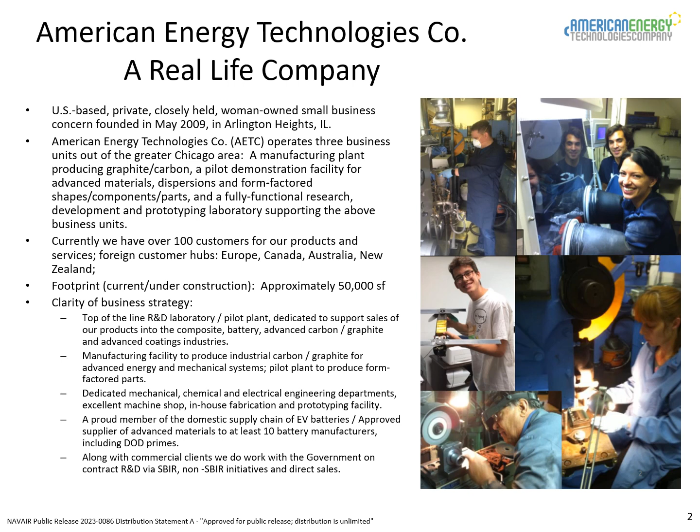Along with our extensive work with commercial clients, we also do work with the government on contract R&D via SBIR and non-SBIR initiatives. What technology have we developed that primes need? Currently, ramjet and rocket technology is undergoing massive innovation, with the industry attempting to transition from traditional fuel technologies into a more advanced metallized fuel component, which could drastically improve the range and performance of rocket-powered munitions.

With this in mind, AETC developed an innovative, carbon-based ablative nozzle liner that will maximize the combustion performance of an entirely new generation of rockets operating with the aforementioned advanced fuel. In order for this fuel to be rated for use in advanced rocketry systems, a more robust, higher-temperature material that can properly manage the energy contribution to the thrust is required for the nozzle insert. The thrust contribution, which is currently not a feature of traditional nozzle insert manufacturing technologies, will allow for increased performance and a substantially longer flight range. This particular nozzle insert technology, which has been developed, also has a unique application utility in solid fuel ramjets.

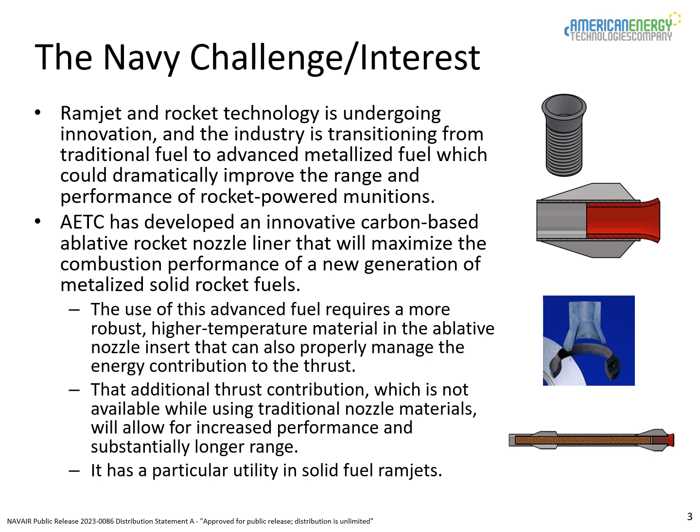What has been improved? AETC's nozzle technology was developed in order to improve the utilization of metallized fuel in air-breathing applications. The technology offers an improved thermal conductivity and increased reflectivity, withstanding the high temperatures generated in advanced fuel systems, with a longer burn endurance, leading to increased thrust and performance of the rocket vehicle. AETC's nozzles provide a contribution for the after-the-throat energy release to the rocket's thrust, which, in turn, will allow for a substantially longer target range.

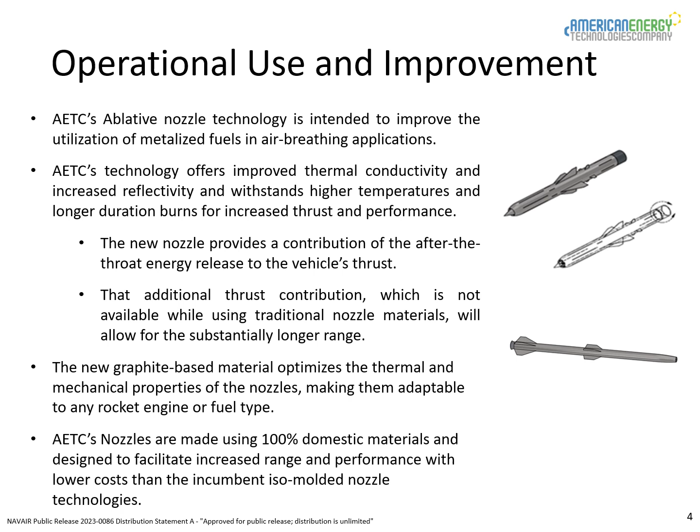The new nozzle is comprised of a graphite-based material so as to optimize the thermal and mechanical properties of the nozzles, making them adaptable to any rocket engine or fuel type. These nozzles are made using 100% domestic materials, designed to facilitate increased range and performance for lower cost than the current incumbent iso-molded nozzle technologies. More specifically, traditional technology is manufactured via large billets, which are up to 60 inches in diameter. Please refer to Figure A.

This method requires extensive labor and incredibly expensive and large equipment. The billets are precision machined down into discrete parts, sized to the diameter for the ablative nozzle inserts. Considering how large the billets are to begin with, a significant amount of the expensive, iso-molded graphite ends up in the process waste stream to create the final product. Our uniaxial compression molding and precision die capabilities are utilized in order to manufacture our ablative nozzle parts, instead of using the large billets, allowing for major cost savings over traditional technology.

Our primary objective in developing this technology was to prevent condensation of the oxide phase on the nozzle. AETC's advanced capabilities have thus far resulted in the fabrication of several candidate carbon composite materials uniquely suited for new formulations of solid rocket fuel.

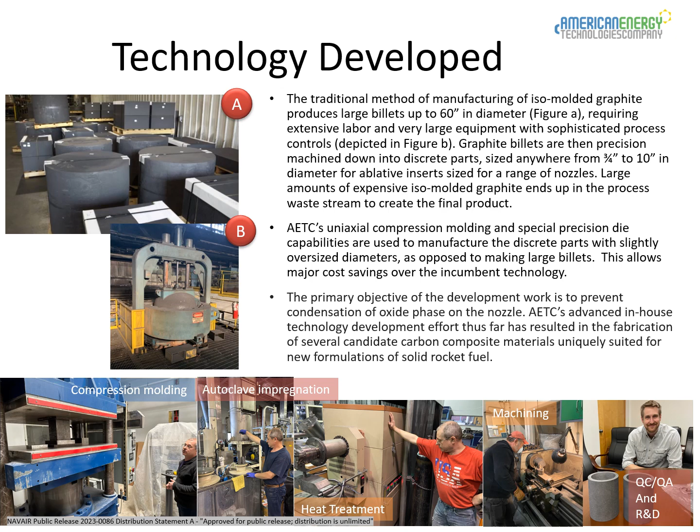This project is currently situated on TRL-5, with a projected TRL-8 ending. AETC will require additional funding following the SBIR contract end date in order to enable the production of form-factored prototypes for testing. AETC will demonstrate our ability to produce the prototypes, generating them for qualification testing at Naval Air Warfare Center, Weapons Division, China Lake.

Successful technology validation by government testing facilities will open a pathway towards the commercialization and upscaled production of the nozzle parts in order to integrate them with primes such as Lockheed, Raytheon, and Boeing. AETC is looking to generate interest within the Department of Defense, with organizations such as the Army Space and Missile Defense Command, the MDA, NASA, and more.

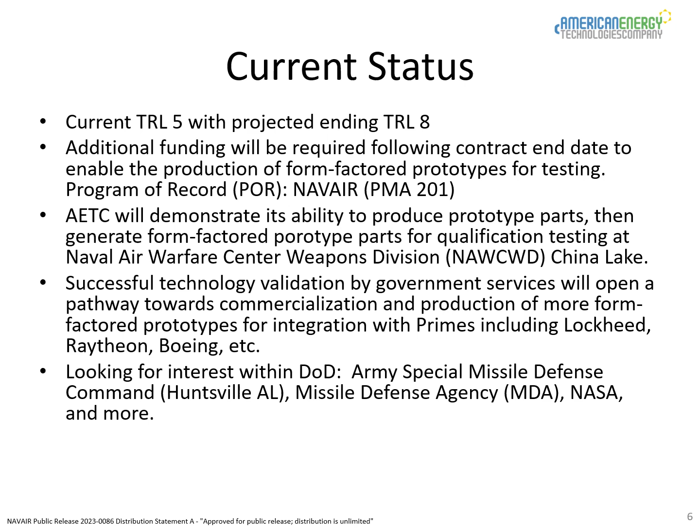A few advantages and benefits of the technology include its ability to enable potent, advanced metallized fuel, so as to dramatically improve thrust, range, and rocket performance in rocket engines. Since these fuels typically require a more robust, higher-temperature material, AETC's technology can maximize the combustion performance of new-generation rocket fuels. Our nozzles are also suitable for all current and future production rocket-powered munitions.

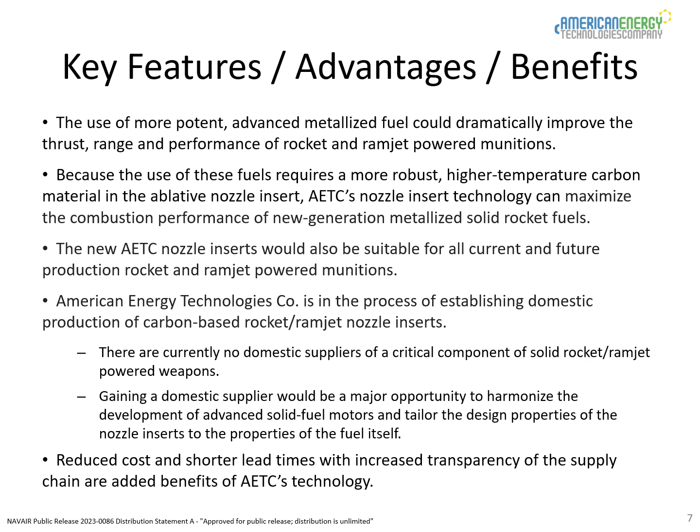AETC is seeking to establish domestic production of carbon-based rocket nozzle inserts, as there are currently no domestic suppliers of a critical component of rocket-powered weapons. Gaining a domestic supplier of nozzle inserts would be a major opportunity, so as to harmonize the development of advanced rocket fuels and nozzle inserts that can be optimized alongside them. AETC's reduced manufacturing costs and shorter lead times, with the increased transparency of the supply chain, are a few other added benefits.

As a method of transition into the fleet, NAWC-WD China Lake recently secured internal funding to begin performance validation testing on AETC's nozzle inserts, compared to the control laboratory formulation. AETC will use the remainder of Phase 2 in order to support the evaluation program and produce parts in accordance with MIL specs. The nozzle prototypes are anticipated to be delivered to NAWC-WD in February of 2024 to undergo a full year of testing. SBIR Phase 2 enhancement will be required in order for AETC to continue making samples for the China Lake standards testing, with a specific budget in mind to be allocated for synthesizing the nozzle parts.

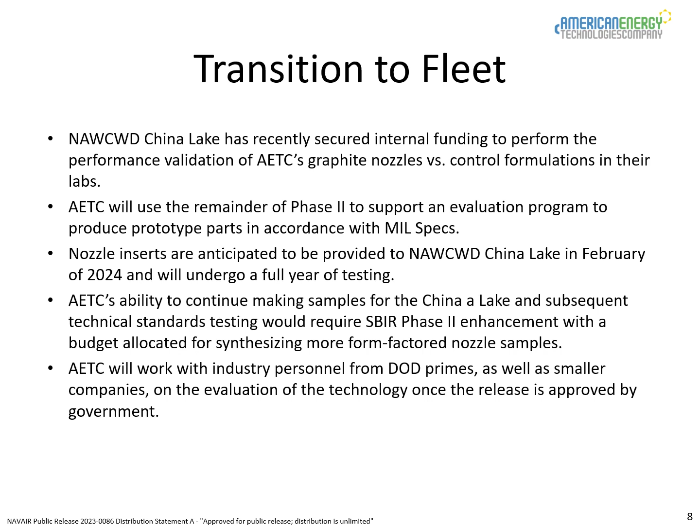AETC has plans to work with industry personnel from DoD primes, as well as smaller companies, in order to completely evaluate the technology once release is approved by the government. AETC is looking to transition the nozzle technology into primes using metallized fuels and propellants, in order to establish a domestic supply chain for the nozzle inserts. We are seeking an introduction to primes such as Lockheed Martin or Raytheon, or similar partners that work closely on the development of rocket-powered munitions and missiles.

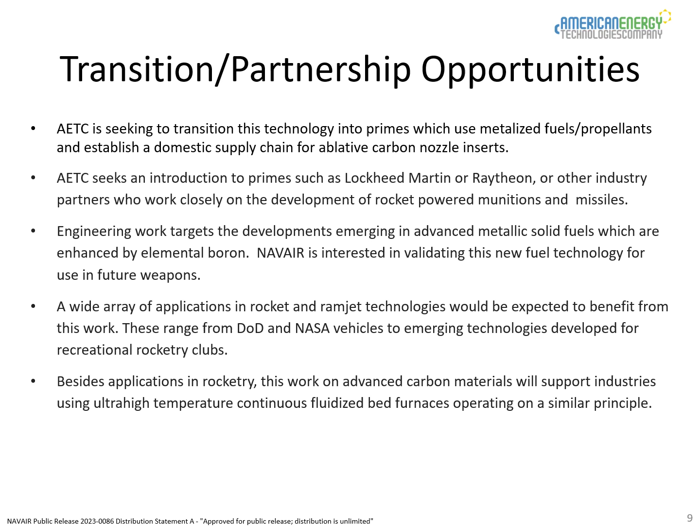The engineering work of this endeavor targets the emerging advanced metallic solid fuels, which are created using enhanced elemental boron. NAVAIR has expressed interest in validating this fuel technology for use in future weapons. It is expected that a wide array of rocket systems will benefit from this technology, ranging from DoD and NASA vehicles to those developed in hobby rocketry. The technology is also anticipated to support the ultra-high-temperature, continuous fluidized bed furnace industries, which operate on similar principle.

To wrap up, AETC is always excited to meet with and speak to new customers and primes. We would love the opportunity to collaborate with any company or organization that has interest in our technology and the advancements described in this presentation.